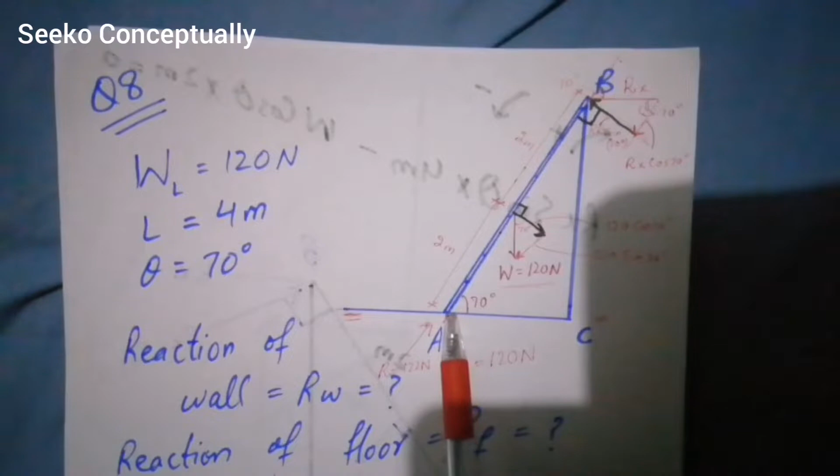So the horizontal support provided by this ground floor is actually the friction between the bottom of this ladder and the surface of this ground floor.

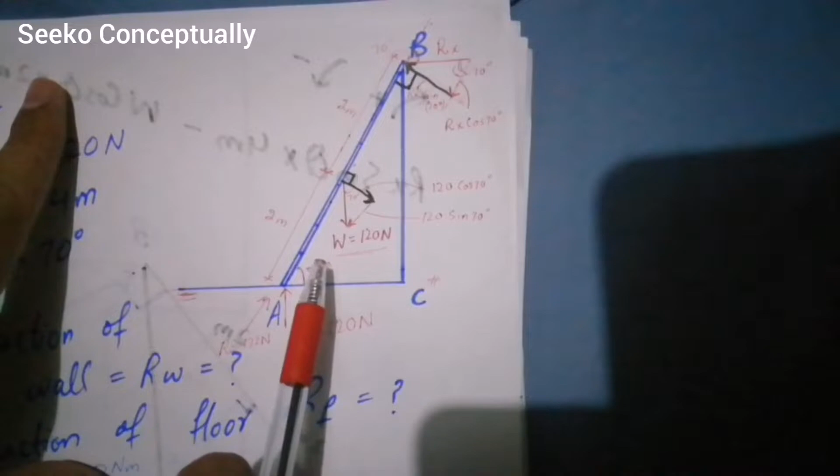And also the summation of all the clockwise and the anti-clockwise torques is equal to 0. We will use both these conditions to solve this problem. Let us first find the vertical support that is provided by this ground floor to this ladder and that we named as Ry.

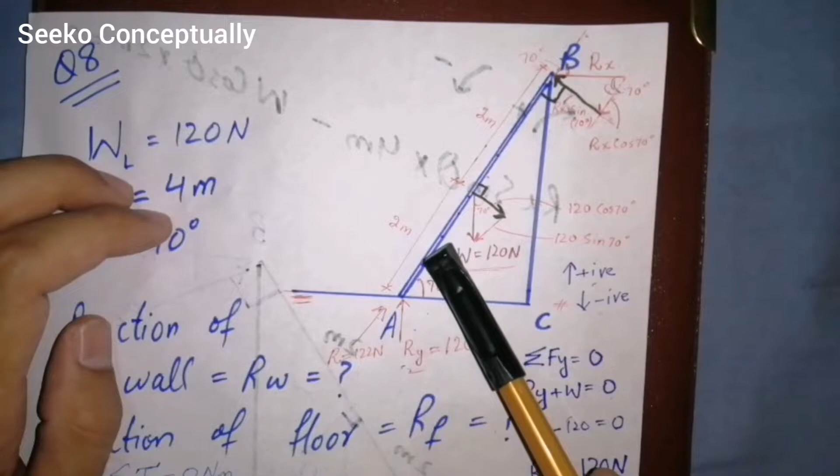Overall, two vertical forces are acting on this ladder. The first one is the weight of this ladder, that is 120 Newton, and that is acting downward, and the second force that is acting vertically on this ladder is Ry, that is acting upward. This ladder is not moving upward and it is not moving downward. It is at rest, which means it is in equilibrium, which means summation of all vertical forces is equal to 0, which means Ry plus W is equal to 0.

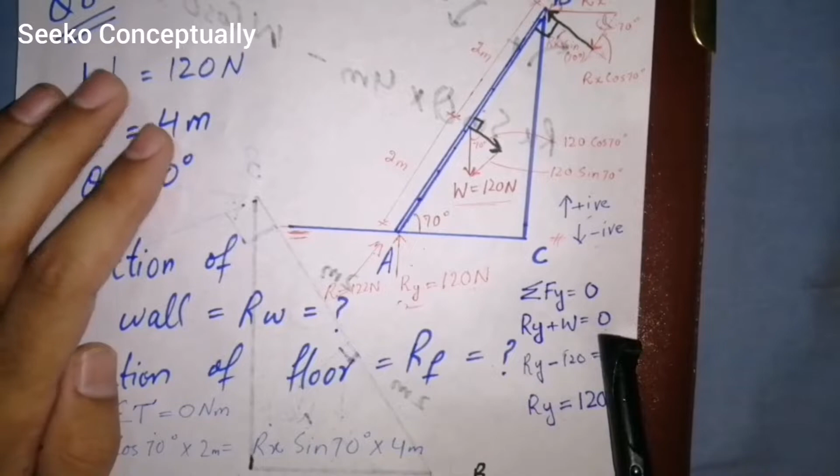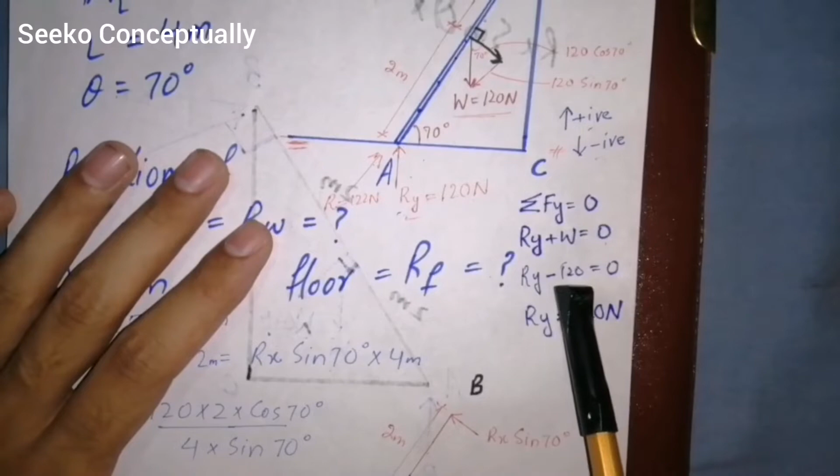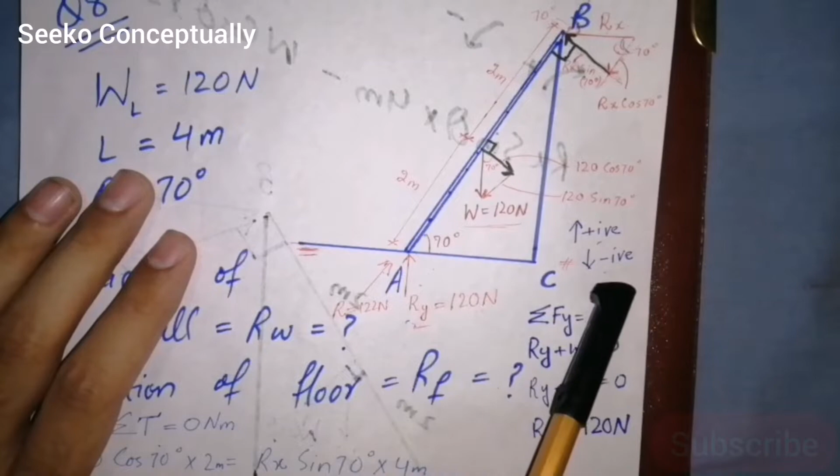If we take all the forces acting upward as positive and all the forces acting downwards as negative, then Ry minus 120 Newton must be equal to 0. The negative 120 Newton is because the weight is acting downward and that we have taken as negative. Carrying this 120 Newton to the other side of the equation, we get Ry equal to 120 Newton.

Now that we have found the vertical support of this ground floor to this ladder, and that is Ry which is equal to 120 Newton, let's move on to the horizontal support that is provided by this wall, and that is Rx. To find the horizontal support, we will consider this point A as a pivot or a hinge. We will take the moments of all the forces about this point.

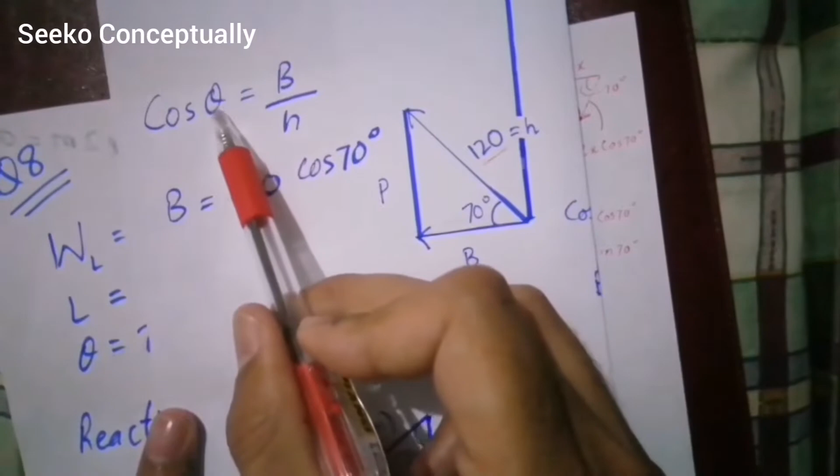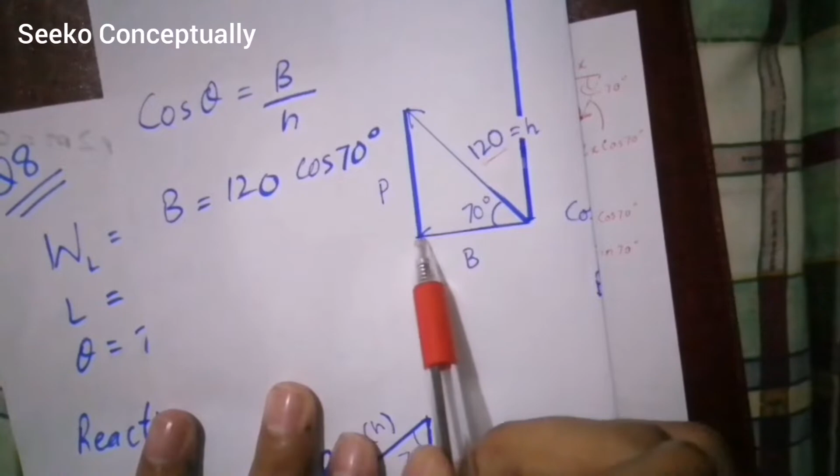which is hypotenuse and theta is 70 degrees. So this component is equal to 120 cos 70 degrees. Now let's solve this second triangle.

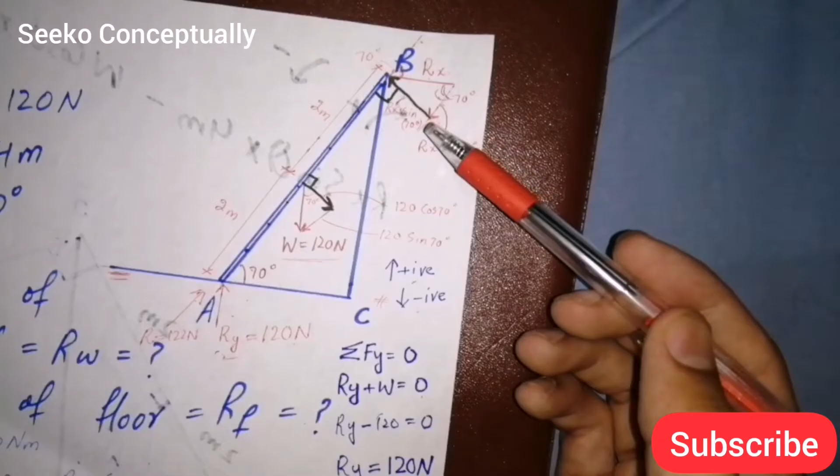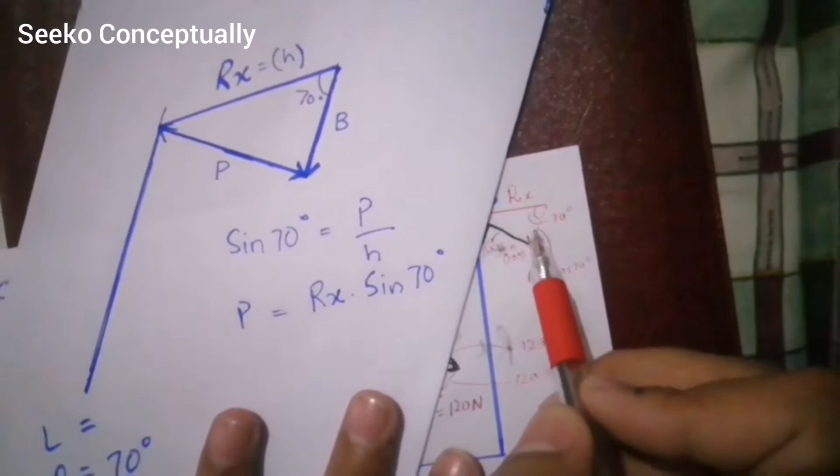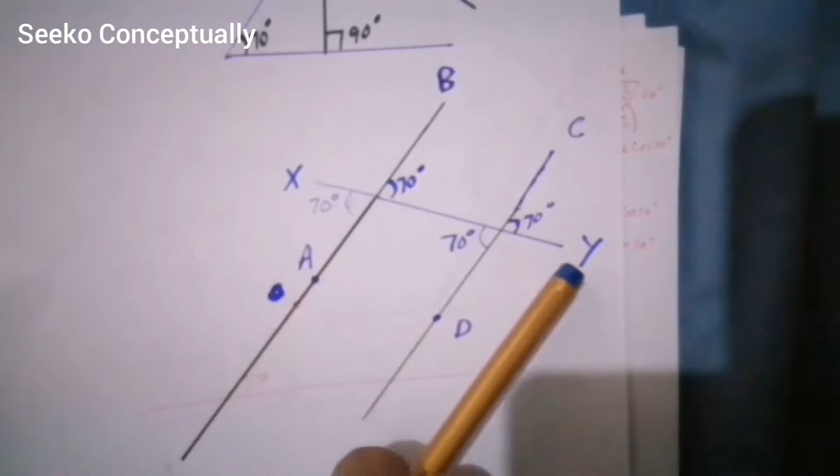Let us first understand why this angle is 70 degrees here. As we know, if two lines are parallel to each other and another transverse line is cutting them, then the angle between the transverse line and the parallel lines must be equal. As here we can see, AB and CD both are parallel to one another, and line XY, which is transverse to both of them, is cutting them.

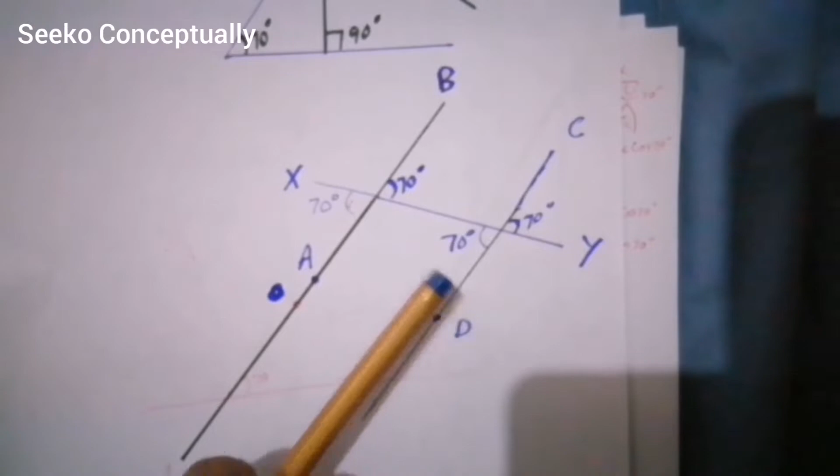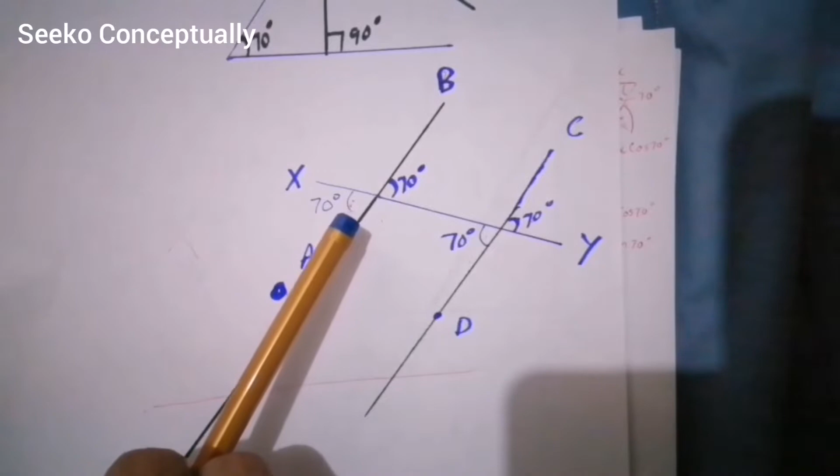So the angle between XY and AB, that is 70 degrees, is equal to the angle between XY and CD, that is also 70 degrees. Similarly, if two lines are intersecting each other, are crossing each other, then the opposite angles are also equal.

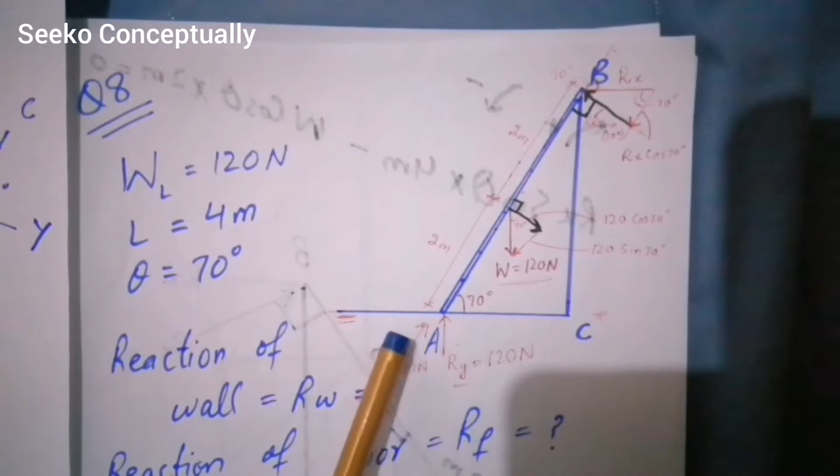So here in our problem, the ladder is leaning on this wall. This Rx is a support from the wall which is horizontal, hence parallel to this surface or the floor, and this ladder is crossing them. So this angle and this angle, both of them are also alternate angles.

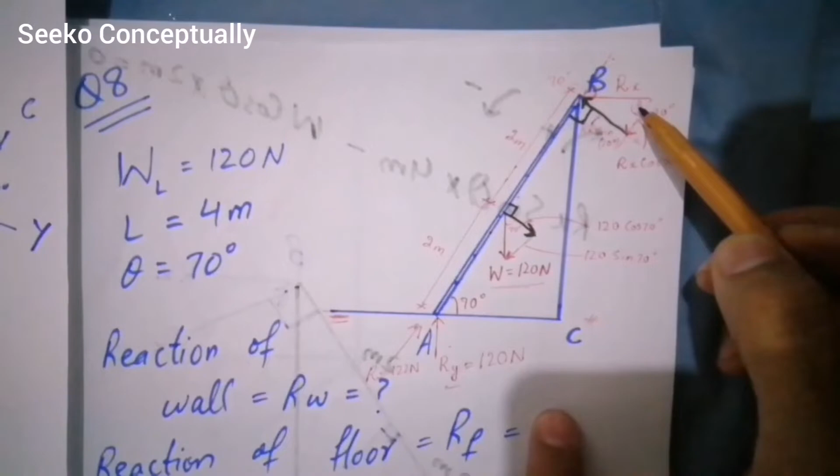Both of them are equal, both of them are 70 degrees. This component of this Rx is parallel to the ladder. So both this component and this ladder are parallel to one another. Rx is crossing them, so the angle here must be equal to the angle here. So the angle here is 70 degrees, so this angle must also be equal to 70 degrees.

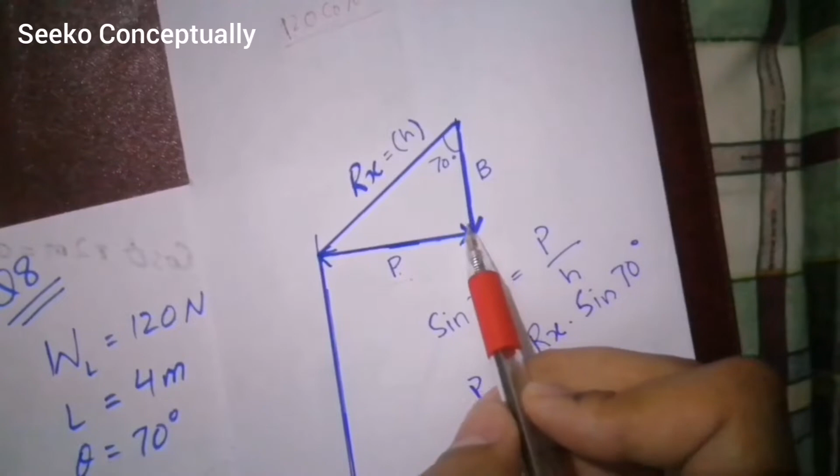Back to the triangle where we are solving it. The side adjacent to the angle is base and the side opposite to the angle is perpendicular, and this is of course hypotenuse, opposite to the 90 degrees. So we have sine theta is equal to perpendicular by hypotenuse. Why do we take this trigonometric ratio?

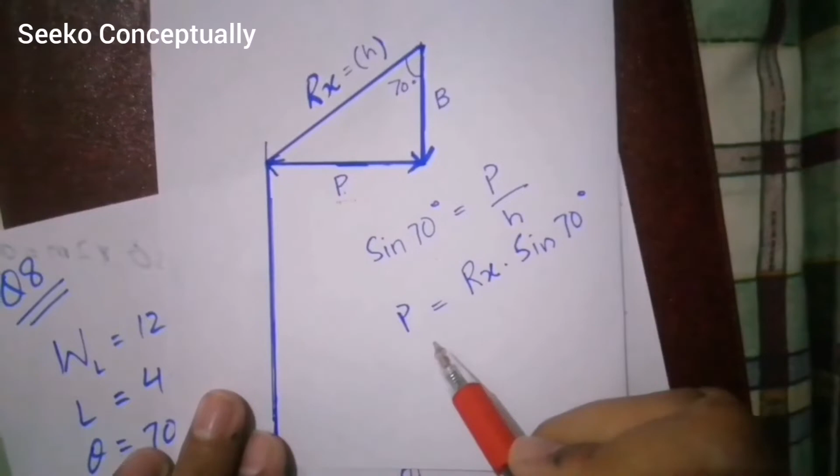Because we are interested in this component, because it is, remember, perpendicular to the ladder. For torque, we are interested in the component that is perpendicular to the moment arm. So this component is perpendicular; we are interested in this one. Sine 70 degrees must be equal to perpendicular by hypotenuse, and rearrange it for perpendicular. So hypotenuse goes this way and perpendicular is equal to Rx sine 70 degrees.

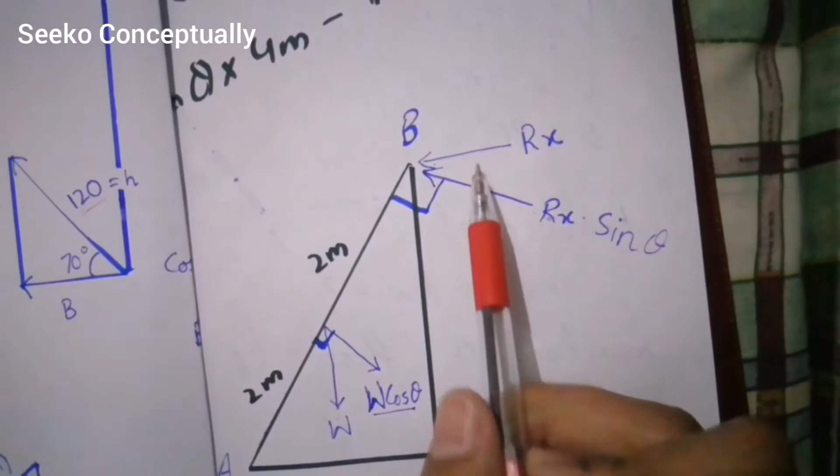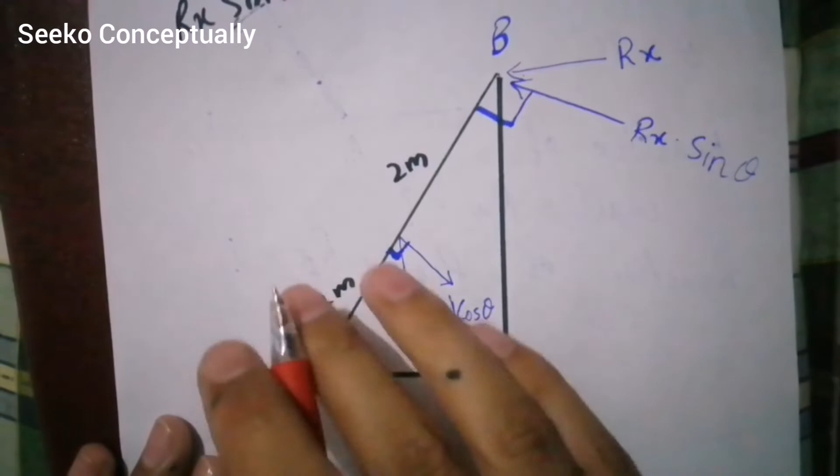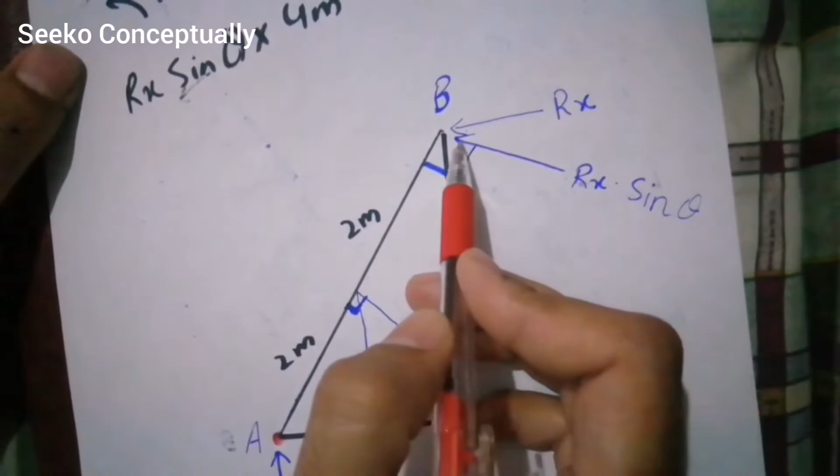After finding both the components perpendicular to the ladder of this weight and of this reaction, we are going to apply the principle of equilibrium. We are taking the moment about point A. We are considering that this ladder is overall rotating around this point A. So torque in this direction is positive and torque in this direction is negative. This force is causing the torque in this direction, which we have taken as positive.

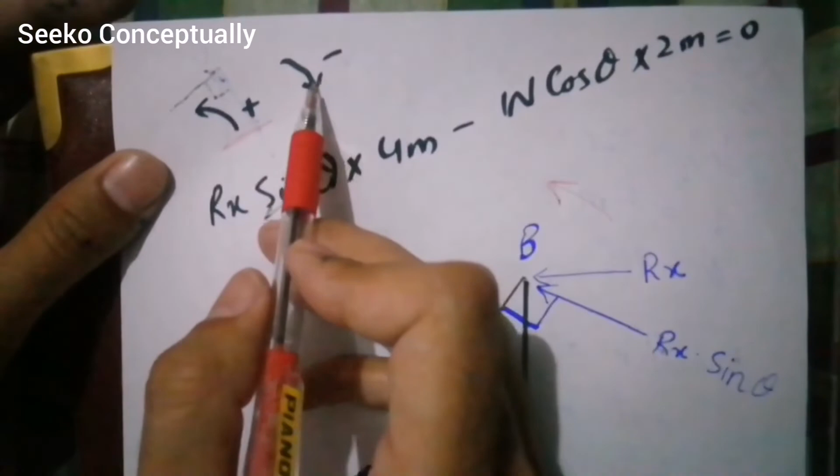This force W cos theta is causing the torque in this direction, and we have taken the torque in this direction as negative. So Rx sine theta multiplied by 4 meter minus W cos theta multiplied by 2 meter must be equal to 0 Newton meter. Why must it be equal to 0 Newton meter?

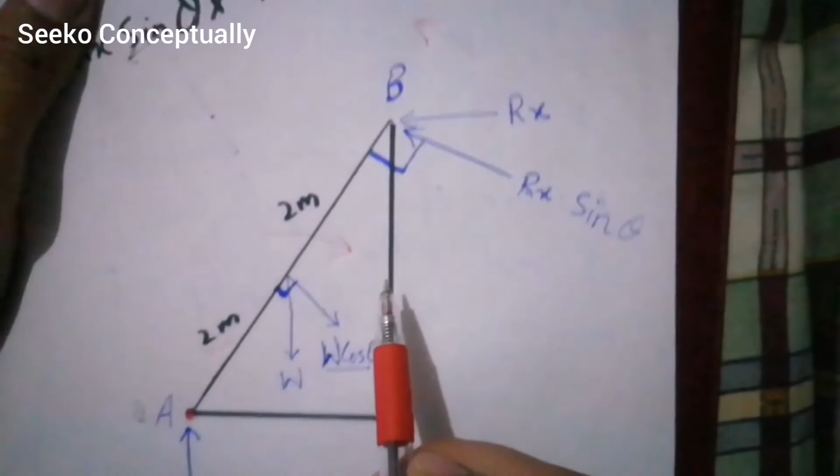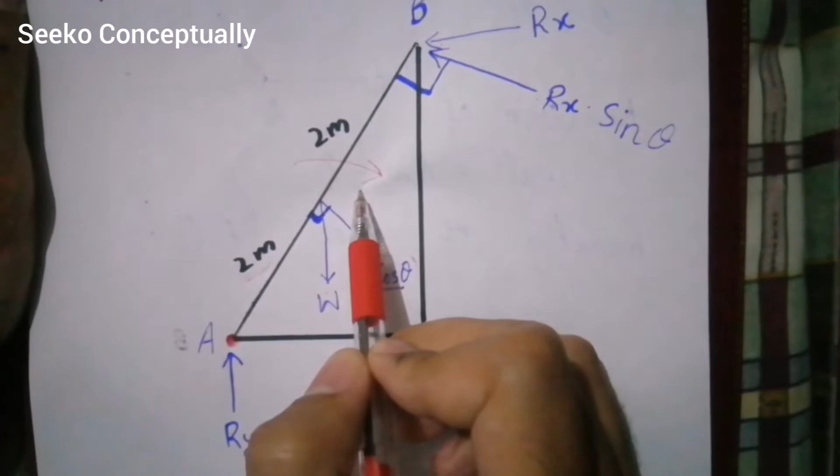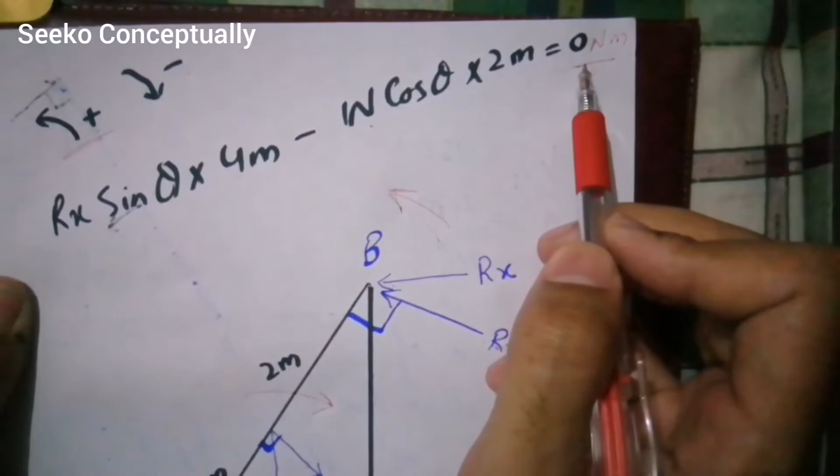As I said earlier, the ladder is holding its position. Neither is it rotating in this direction nor is it rotating in this direction. It is staying in its own position. It is balanced, it is stable, it is in equilibrium. So that's why we have taken the summation of the torque equal to 0.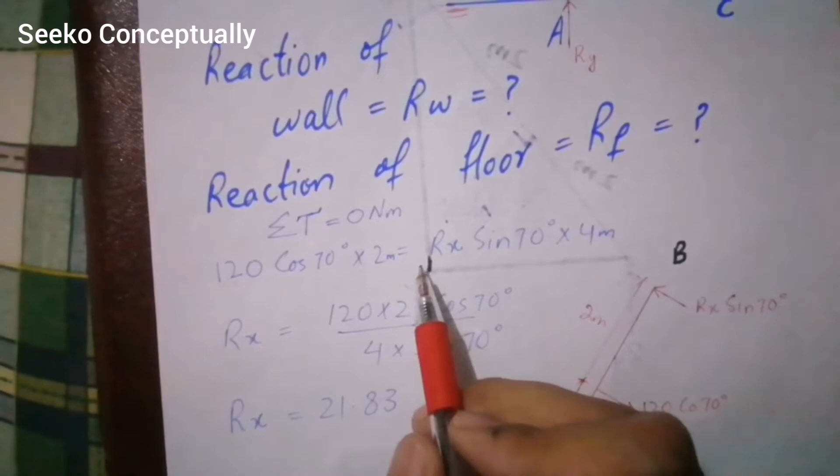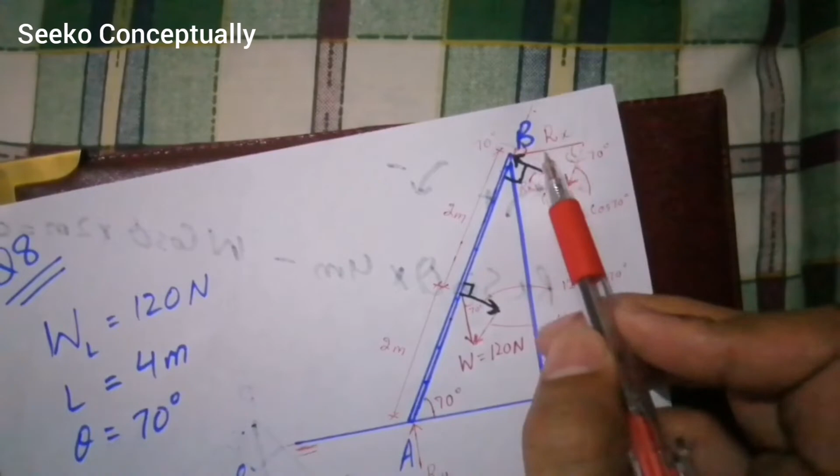Substituting the values, W is 120 Newton, cos 70 multiplied by 2 meter must be equal to Rx sine 70 degrees multiplied by 4 meter. Rearrange this whole equation for Rx. We get this, and putting this term in the calculator we get Rx is equal to 21.83 Newton. So we have found out that the horizontal support of the wall is 21.83 Newton.

The wall is providing no vertical support because it is frictionless, so it is 0 Newton. The weight of this ladder, which is acting downward and is equal to 120 Newton, is supported by the floor with this vertical support of 120 Newton. This horizontal support of the wall is horizontally balanced by this force provided by the floor due to its friction, which is equal to this support but exactly in the opposite direction.

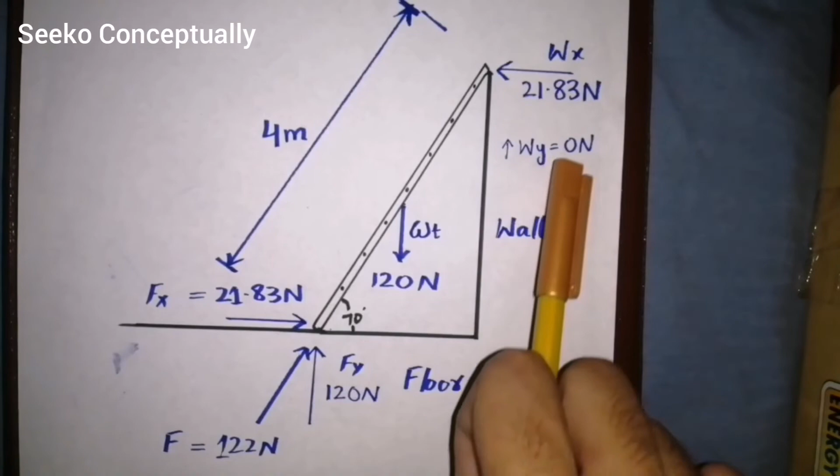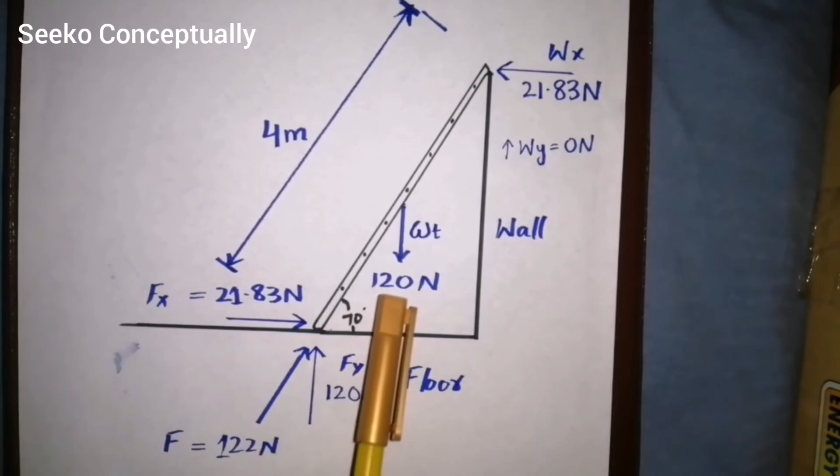As we know, this ladder is not moving forward and backward, it is stable and static, which means the horizontal forces must add up to 0. So there must be a force opposite to this force, and that is Fx. This force is due to the friction between the floor and the bottom of the ladder.

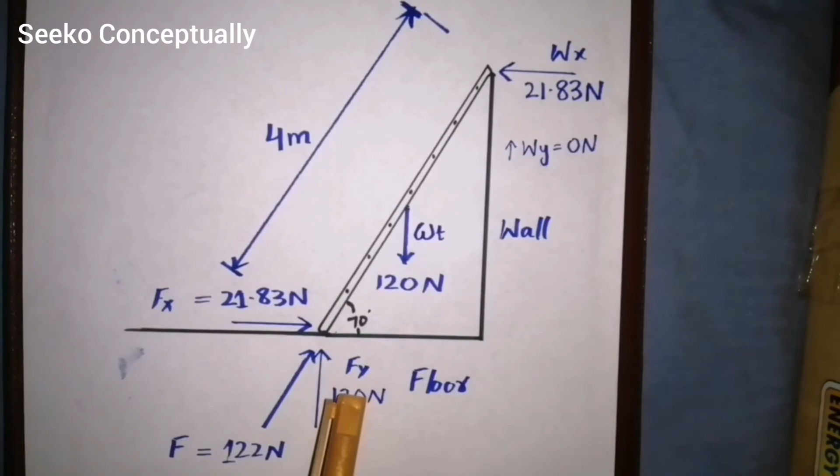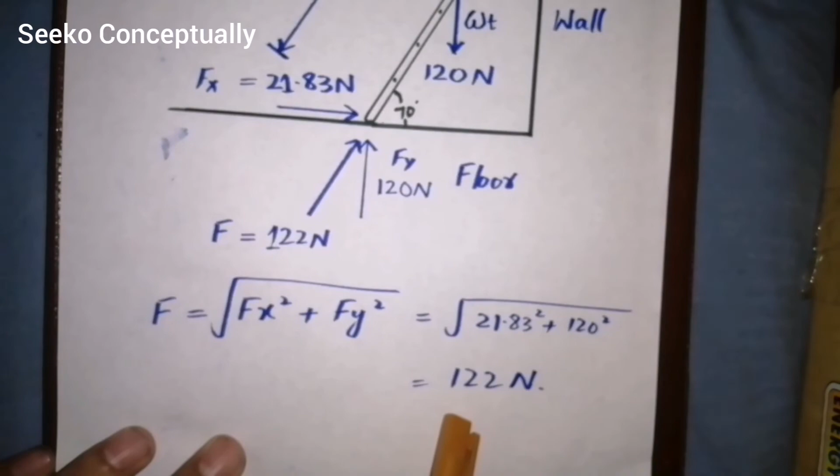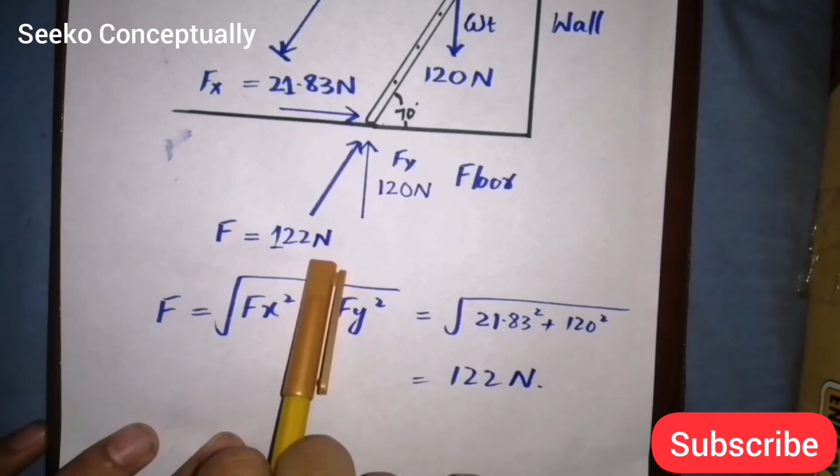So now, in order to calculate the overall support by this floor, we just combine both these components of the support, Fx and Fy. For that we have the formula: F is equal to the square root of Fx squared plus Fy squared. Putting both the values in here, we find out that the overall support of this floor is 122 Newton, in the direction of the length of the ladder itself, which is at 70 degrees to the horizontal.